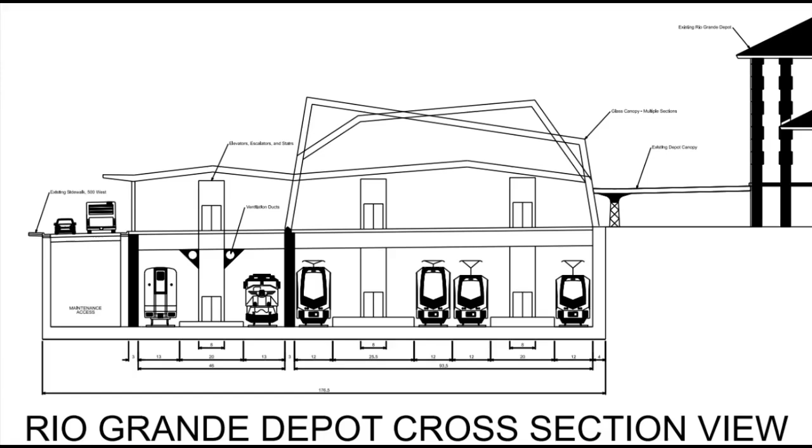The Rio Grande Plan is a vision for returning rail service to the Rio Grande Depot in downtown Salt Lake City. This means some sort of grade separation will be necessary, since the old rail right-of-way is now, and always was, a public road. Salt Lake City has needed the benefits of grade separation for a long time, with extra-long freight trains blocking traffic, including pedestrians and emergency vehicles, from moving between neighborhoods, especially east-west. Each railroad crossing west of downtown sees about 50 trains per day, and when Frontrunner doubles its frequency by the end of the decade, and with the inland port attracting more freight traffic, this number will be closer to 100 trains per day per crossing.

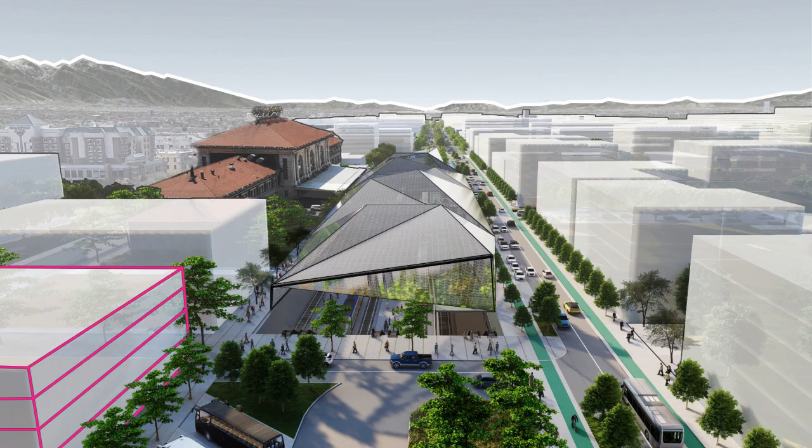The Rio Grande Plan is an opportunity to do 4 things at once. 1. Return rail service to the Rio Grande Depot, giving us one of the grandest train stations in America and a more centralized transit hub worthy of our great city. 2. Grade separate multiple crossings that have become increasingly congested and which have been the locations of multiple fatalities.

3. Relocate the underutilized rail yards and tracks on the west side of downtown into a new corridor, which will open dozens of acres for urban redevelopment. The increased tax revenue from this currently underdeveloped land will be an important source of revenue and could be the location for housing thousands of future Salt Lake City residents. 4. Reconstruct the freeway ramps into shorter, less intrusive structures.

Currently, the 3 big bridges on 4th, 5th, and 6th South extend all the way to 5th West, creating an unattractive maze of one-way streets and dead ends. When the railroad tracks are relocated, there will be no need for these bridges to be so long, and we can cut them back to 6th or even 7th West, opening up a total of 12 blocks worth of new street frontage. The bridge at 4th South can be completely removed, creating a seamless surface street from downtown to Poplar Grove and the Jordan River.

To achieve these goals, I have pitched the specific solution of burying the rails in a train box below the historic rail corridor of 500 West. In the first Frequently Asked Questions video, I give a detailed explanation of the grades and runout lengths required to achieve this specific vision. In short, the affected area would be between 1300 South, 900 West, and 300 North, with the North Temple Frontrunner station left just how it is now. Let's call this Option 1.

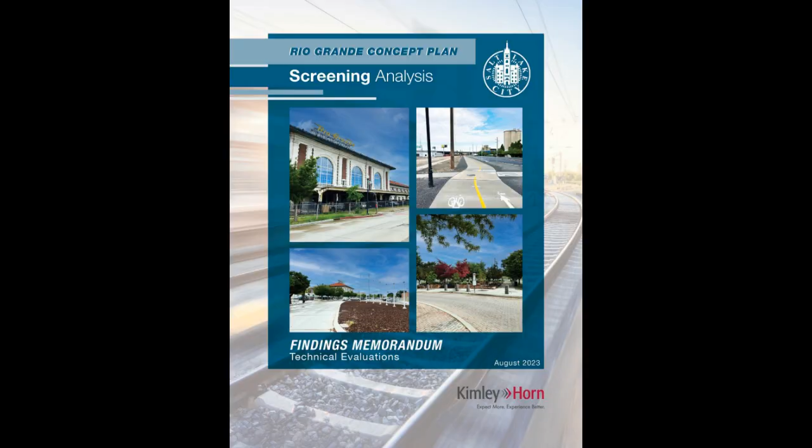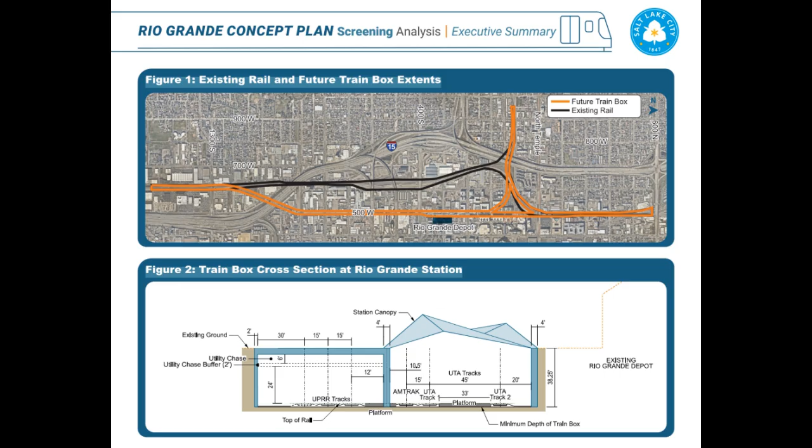In 2023, Salt Lake City published a screening analysis of my original plan, completed by engineering firm Kimley Horn, and this analysis modified the north end of the plan substantially. Instead of ending at 300 North, the plan includes bridges at 300 and 400 North, with the train box finally ending at 500 North. Instead of ending at 900 West, the western extension goes out to 10th West, with bridges at 900 West and 800 West. The original assumed that 800 West could be closed or rerouted instead. This new version of the plan also reconstructed the North Temple Frontrunner station, meaning there would now be 2 new underground commuter rail stations in Salt Lake City. Obviously, all these add-ons were not cheap, and the price tag came in a lot higher than anything I had been expecting, at $3 to $5 billion.

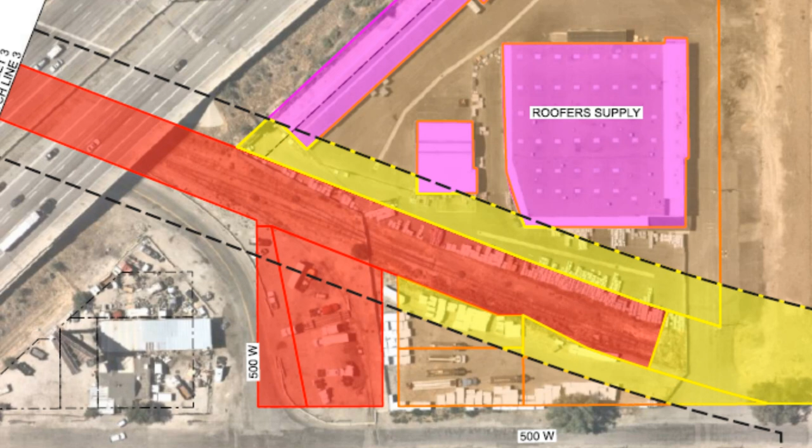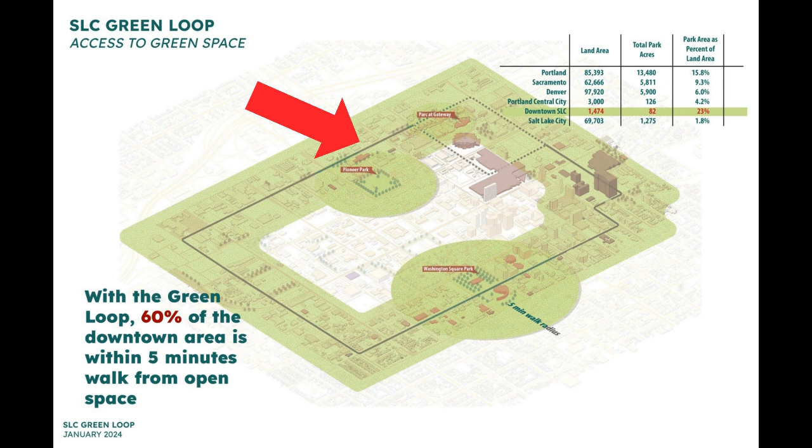Let's call this version Option 2. In the year since that screening analysis came out, the cost of the expanded project has been the main point of attack against the Rio Grande Plan. There have been other attack routes too, such as by property owners who feel that a large train box under 500 West would negatively impact their existing properties, or that the train box would conflict with plans for the proposed Green Loop Linear Park. With each of these criticisms, there have been suggestions on how to reduce the costs and impact of the Rio Grande Plan.

So, in this Frequently Asked Questions video, let's review 6 more alternative grade separation schemes that have been pitched to me. Since we already have options 1 and 2, let's begin with Option 3, Bury in Place.

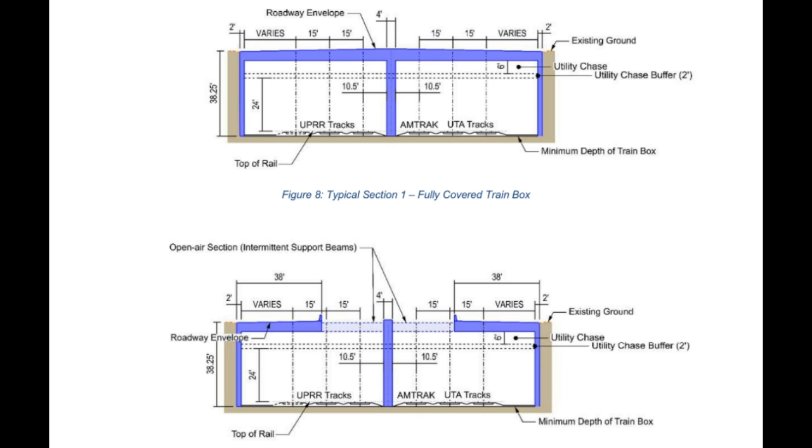This option proposes to build the train box, just like options 1 and 2, except this one would be exactly where the tracks are now, and not on 5th West. The benefit is that 5th West is left undisturbed, and the Green Loop project can proceed as planned. While I personally believe that both the Green Loop and the train box can coexist without issue, I do have to admit it will be much easier to build a park with trees and green space when it isn't on the roof of a huge civil infrastructure project.

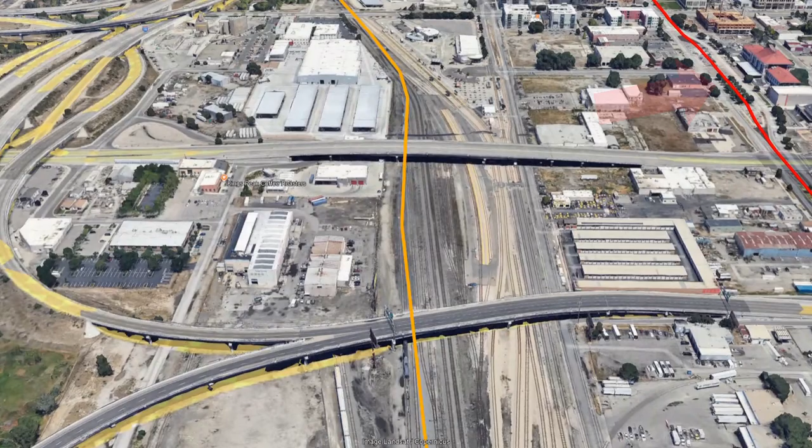Unfortunately, these are the only two benefits to this option, and the downsides are many. The first is that because the Rio Grande Depot is on 500 West, moving the train box means that rail service could not be restored to the depot, and all the benefits of a closer proximity to downtown, a historic and first-class transit facility, and the activation of the western downtown area would all be forfeited. Essentially, this would no longer be the Rio Grande Plan.

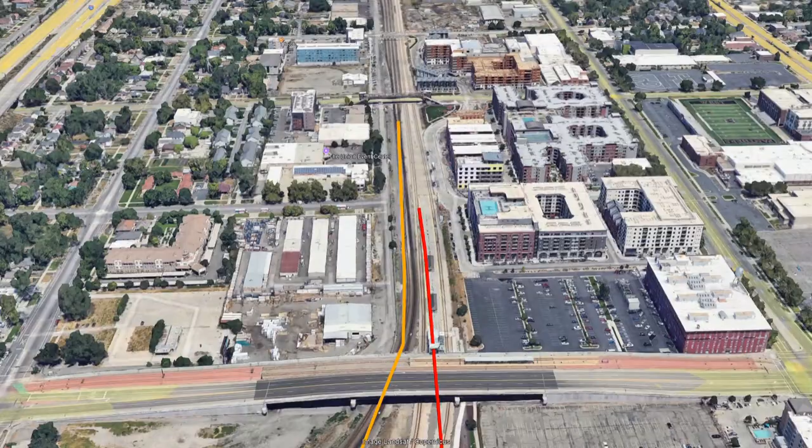While it would be possible to cut back the highway viaducts, as we have proposed, the issue of Salt Lake Central Station being in a non-central location will not be solved. Transit in Salt Lake City will continue to be inaccessible or unappealing for a majority of trips, and our central station design and neighborhood activity will reflect that.

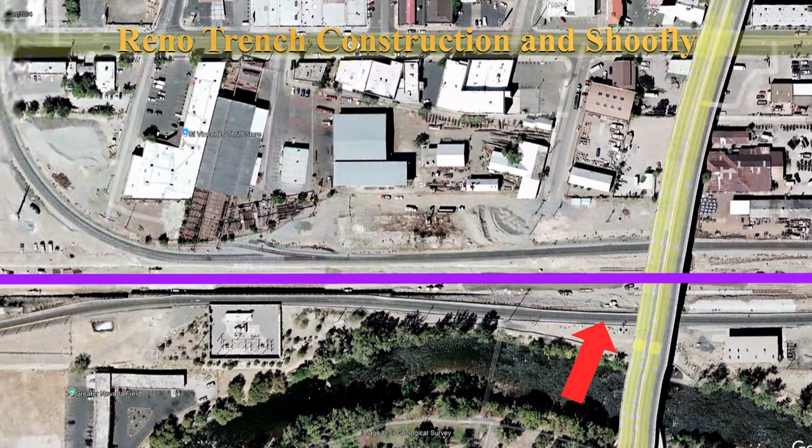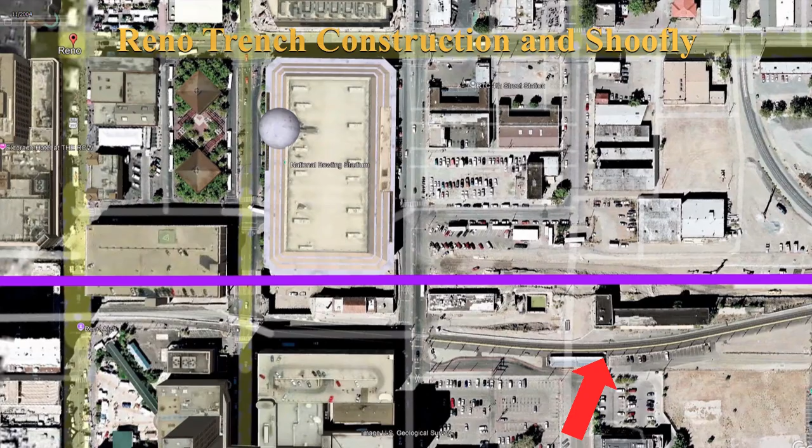Furthermore, this option will probably end up costing even more than the 500 West option. Building a train box underneath an active railroad track is not feasible, so temporary bypasses will need to be constructed and placed in service before construction on the train box can even begin. In Reno, which had a similar issue, this meant a temporary shoofly constructed in the city streets while their trench was dug out and finished.

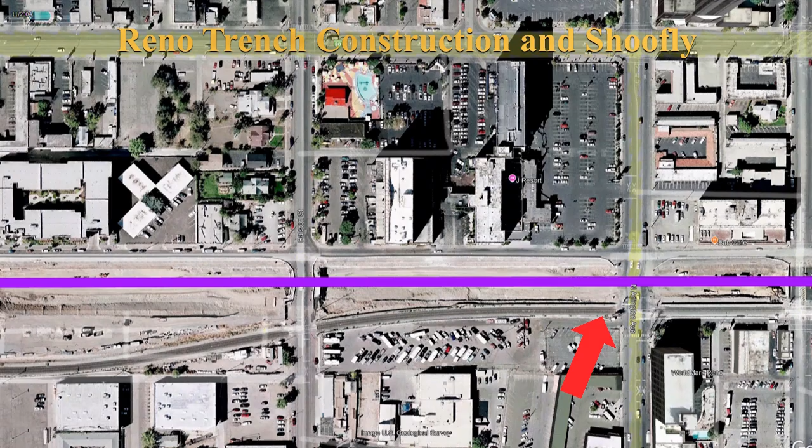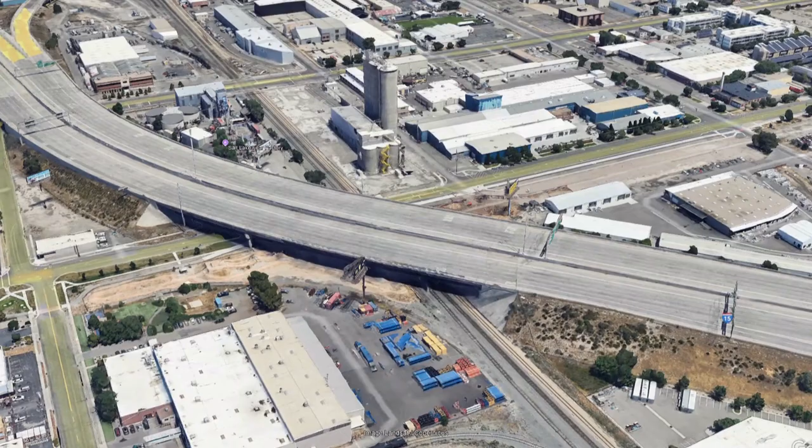This will be disruptive and expensive enough for freight trains, but for UTA commuter trains, this will likely mean years of bus bridges around Salt Lake City, their main source of ridership. Freeway commuters would also be subjected to years of delays, as the I-15 bridge at 900 South is not wide enough to accommodate any more than the 3 tracks it spans now.

This means that the freeway bridge will need to be completely rebuilt to not only be wide enough for 5 or more tracks, but also have foundations that go deep enough to allow it to span over a below-grade train trench. I could keep going, but I think you get the point.

Option 4: Reroute through city blocks to the Rio Grande Depot. This option has the same south end as the previous option, namely building a below-grade box in place below 900 South and 800 South. All the same problems I mentioned before about shooflies and freeway bridges still apply.

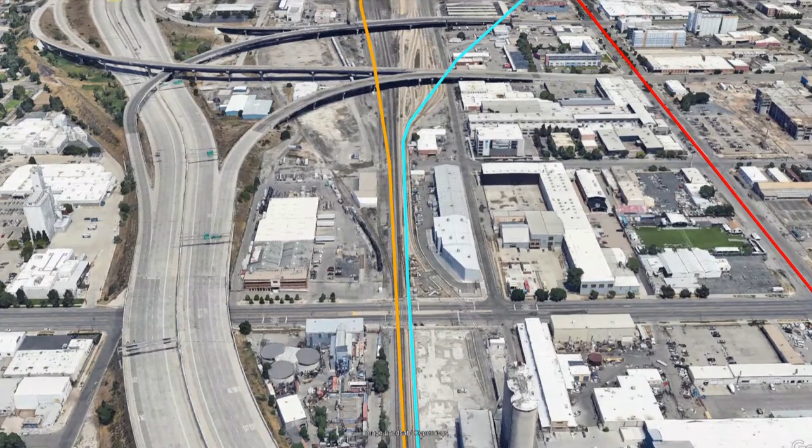But this time, instead of going straight north to Salt Lake Central Station, this option goes cross-country, purchasing right-of-way through existing blocks to switch over from 600 West to 500 West. Obviously, purchasing new right-of-way creates even more expenses, but this time the plan actually does reach the Rio Grande Depot, so at least we are talking about the Rio Grande Plan again.

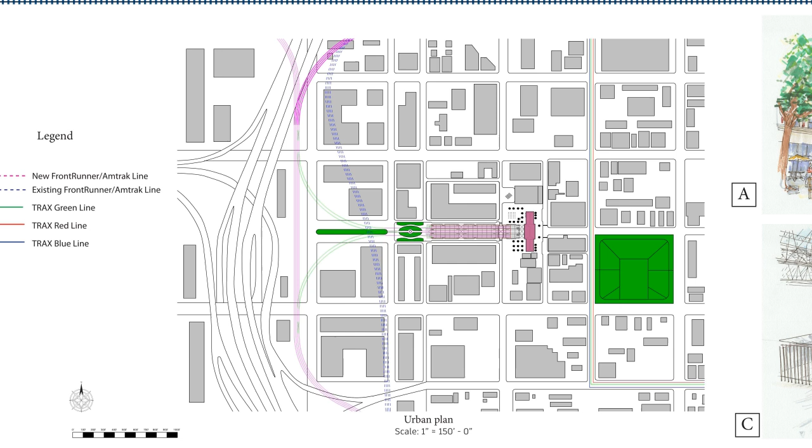But what if there was a simpler way to connect to the Rio Grande Depot? Option 5: The Rio Grande Terminal. What if, instead of a through station, we constructed 4 stub-end tracks on 300 South and turned the Rio Grande Depot into the Rio Grande Terminal?

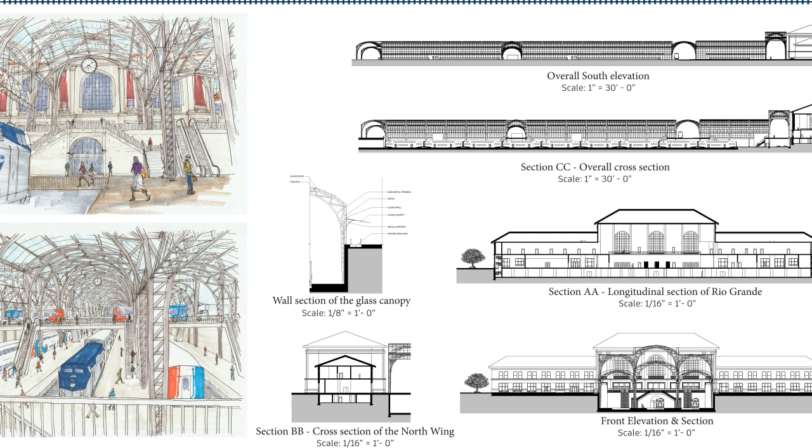After all, 300 South is just as wide as 500 West, so there would be plenty of space for a frontrunner platform and an Amtrak platform, and no space would need to be given to Union Pacific, since they would stay right where they are. This is an idea that was not only pitched but visualized by Yan Ho Ing and Sam Weisler from UVU, which is where we get these beautiful renderings, reminiscent of the old Penn Station in New York City, though the actual design could vary.

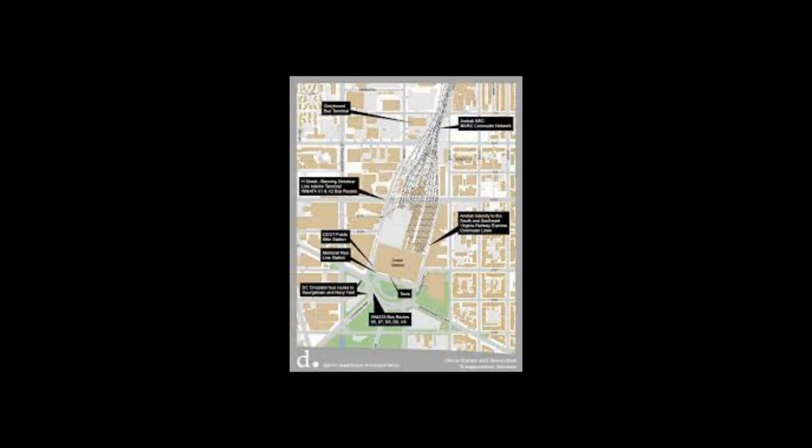Now, it's true that rail terminals have significant operational and capacity issues compared to through-running stations. Trains would need to either back into or out of the station, and the junction into the station would be a perpetual choke point, since we need to allow tracks for both frontrunner and Amtrak to cross over each other. However, bigger stations around the world are able to reliably work around similar issues, so we can't rule this design out based just on theory.

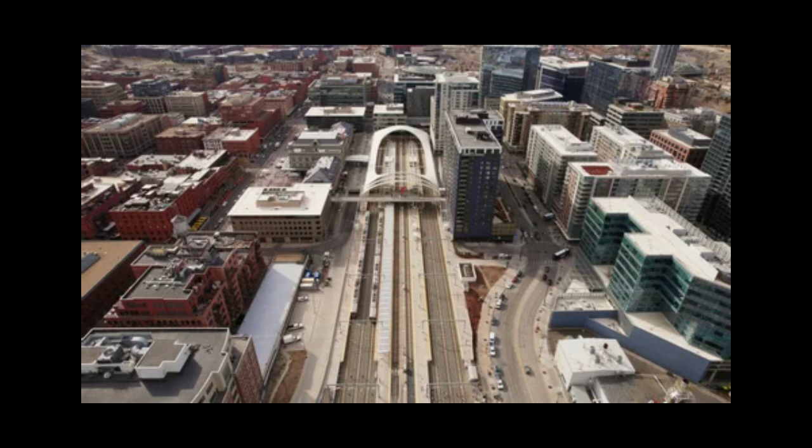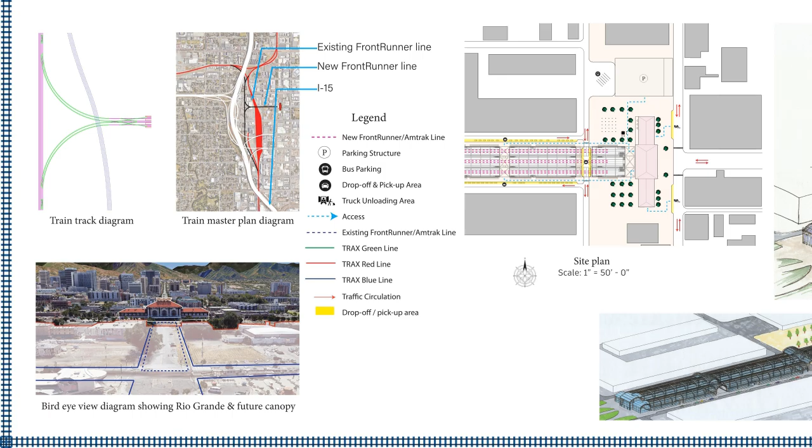Denver Union Station, one of the main inspirations for this project, is a good example of a through station that was reduced to a terminal for the sake of development. And while we in Salt Lake City are arguing about costs, Denver's Union Station is completely paid off and turning a profit.

And since the Rio Grande Terminal would be directly adjacent to the main line, a type of through-running service would still be possible on frontrunner. If everything was running on time, the only noticeable difference from today is that your seat would face the opposite way once you pass the Rio Grande Terminal.

But it isn't all so straightforward. The curves leading up to the terminal wouldn't be compatible with UTA's current headquarters plans and would require some small amounts of RDA land. Furthermore, because Amtrak requires platforms to be at least 1,000 feet long in order to handle their long-distance trains, the station tracks would need to extend all the way under the historic depot and at least as far as 400 West.

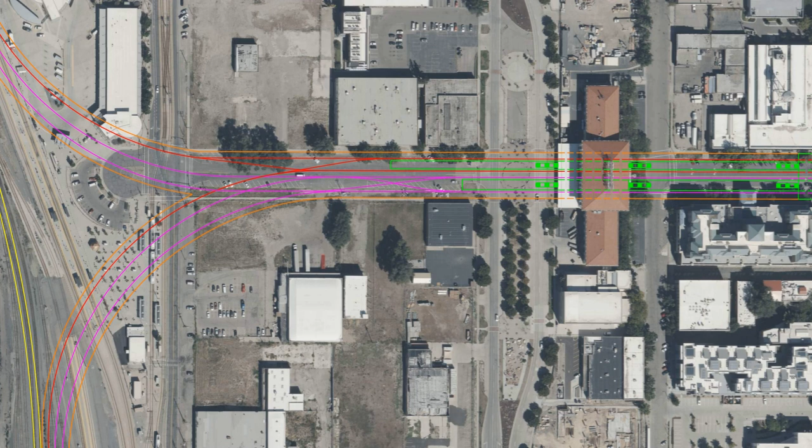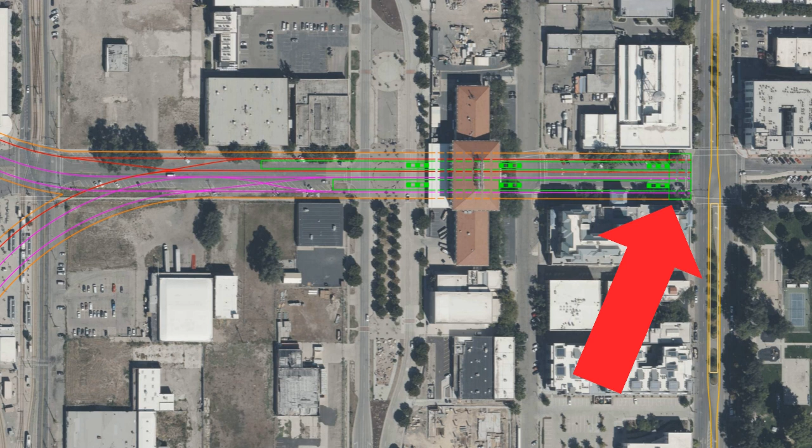That is obviously very expensive, not only because it would require yet another upgrade to the Rio Grande Depot's foundations, but also because it would require the tracks to go even deeper than before just to get completely under those foundations. But there is a silver lining here too. With tracks expanding to the east side, a line up 400 West would be able to deliver passengers directly to the FrontRunner and intercity rail platforms on 300 South, which is a level of convenience unmatched by all other versions of the Rio Grande Plan.

So, while this option does have some fundamental operational and technical challenges, the high level of convenience and the low level of impact to the Union Pacific Railroad make this an interesting idea. Though I personally do not prefer it, I do think it is worth further consideration.

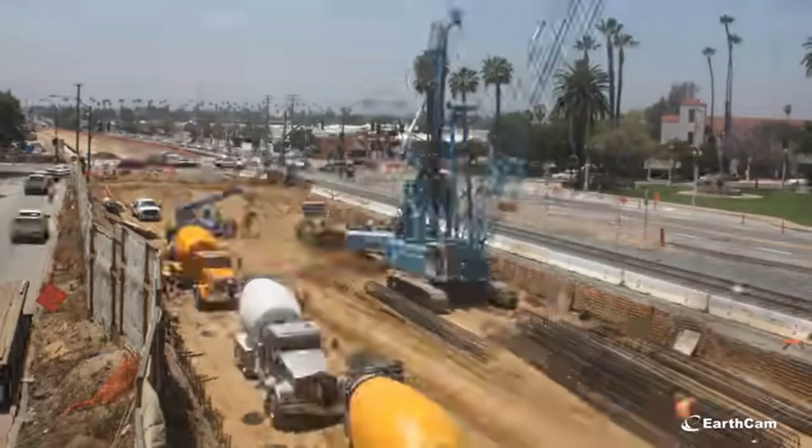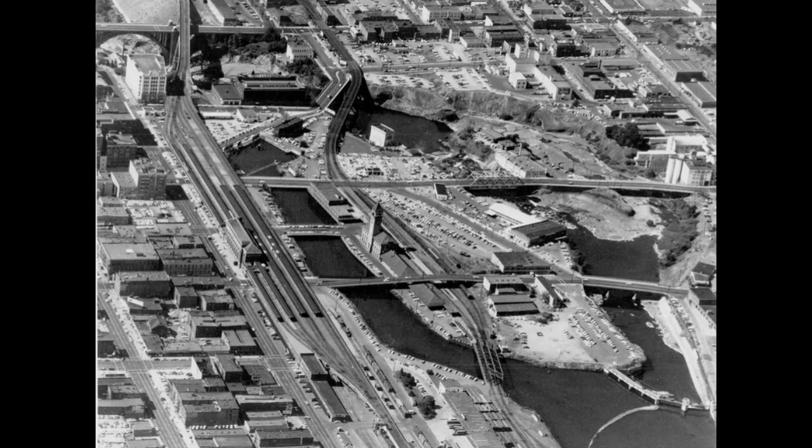Option 6. Elevate the tracks. Digging below grade can be very complicated and expensive, and dealing with the hidden tangle of utility lines is a time-consuming problem. Why not just go up instead of down? This is what local leaders chose for Spokane, Washington, in preparation for the 1974 World's Expo. Spokane's riverfront, the proposed location of the fair, was a tangle of railroad tracks, passenger depots, and freight yards, similar to our own west side.

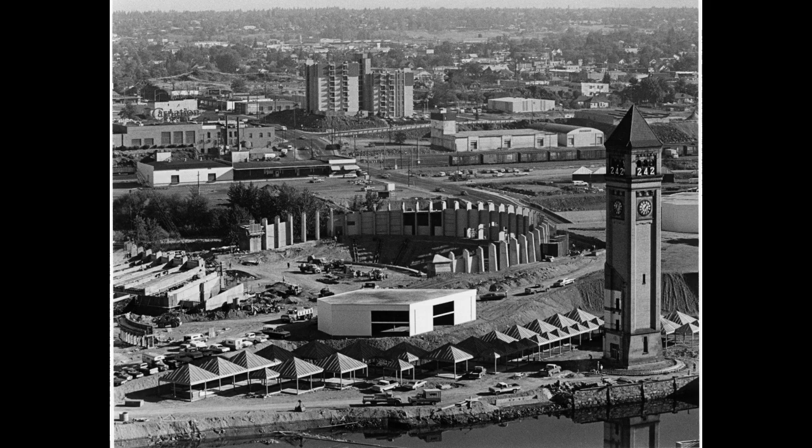However, unlike Salt Lake City, Spokane leadership decided to demolish not just one, but two incredible train stations, leaving only the clock tower of the Great Northern Station to remind residents, forever after, of their historic error. Next, all rail traffic was consolidated from the riverfront to the former Northern Pacific alignment and placed onto a new, elevated structure wide enough for 4 tracks and 2 service roads, totaling 85 feet wide.

End to end, there are 19 railroad bridges through downtown, and all of them have height restrictions for road vehicles and width restrictions for sidewalks. Efforts to improve these bridges have been entirely superficial, because upgrading to modern standards for height and width would be prohibitively expensive, and the private railroad companies have little interest in community engagement.

It is also worth pointing out that when the bridges were built, these were the modern standards for elevated mainline tracks, and they only look uncomfortable to us now because standards have changed. More often, we should ask ourselves, how will the current standards change in another 50 years? Burying the rails will allow the roads above to be continuously updated. Elevating the tracks freezes the infrastructure below them in time.

Beyond design considerations, there are the practical engineering problems. Interstate 15 crosses over the tracks just south of downtown, and elevated tracks would either require the tracks to go up even higher than the freeway, or require the freeway to be raised to double height, which would have cascading effects to half the ramps of the 13th South freeway interchange.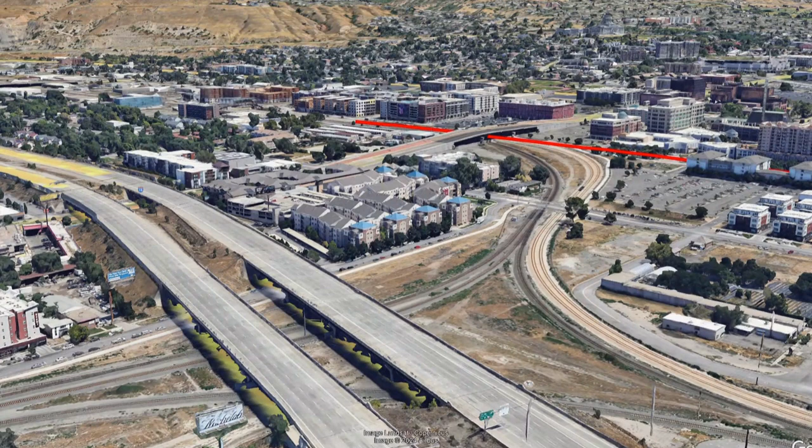A similar conflict exists at the Grant Tower Junction, and the North Temple Viaduct would need to be completely ripped out. And all of this hasn't even touched on the conditions of 500 West, which would somehow have to accommodate up to 6 elevated railroad tracks while still attempting to be an inviting neighborhood street. But what if we don't need to accommodate all 6 tracks?

Option 7. Elevate just the passenger trains. What if we leave the freight tracks where they are and elevate just the UTA and Amtrak tracks? After all, FrontRunner can climb steeper grades than freight trains, and already has 2 significant aerial structures as part of its existing route. Amtrak can and does climb grades just as steep as the FrontRunner, so it should be possible to have the tracks ramp down after crossing 100 North, back to street level before the North Temple Viaduct and North Temple Station.

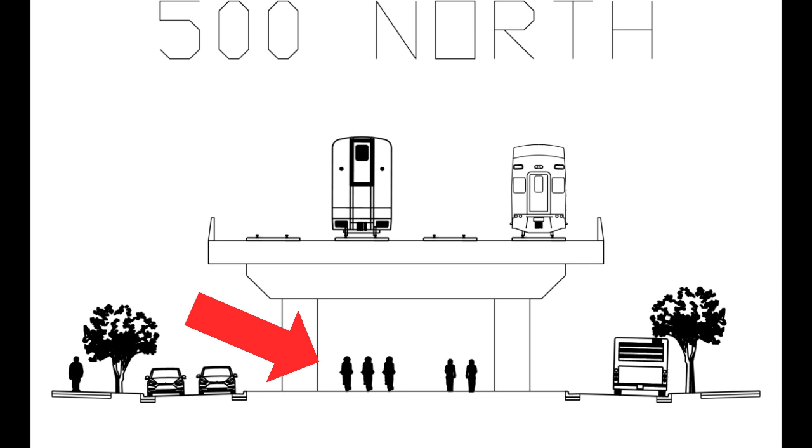With only 3 tracks, 1 for Amtrak and 2 for FrontRunner, the elevated structure would be thin enough to not cover the entire street below. Perhaps just the green loop can go under the structure so as to be sheltered from the sun and snow.

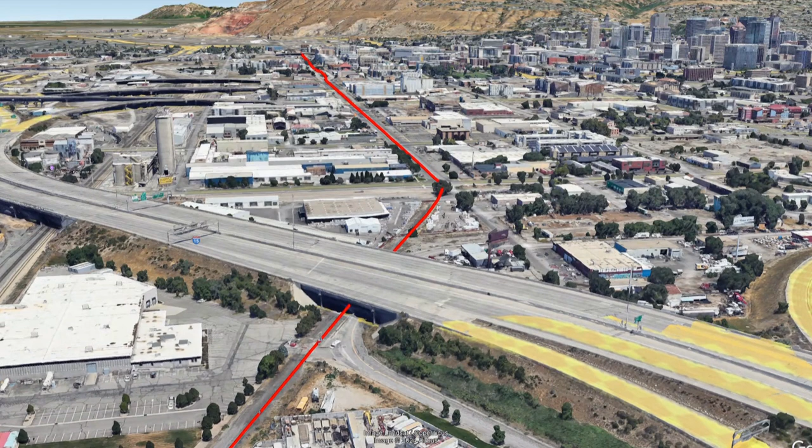The south end, however, has all the same problems as the last option, complete with I-15 being reconstructed across multiple bridges and freeway ramps. That is not a way to reduce costs, and none of this changes the freight situation, since those tracks would remain where they currently are. But I feel like we may be onto something. Let's take this full circle with our final option.

Option 8, the 2-phase Rio Grande Plan. Let's take the idea of routing only passenger trains to the Rio Grande Depot and put just those in the train box on 500 West. The freight tracks will be part of a second phase, and will remain just where they are for now. By keeping the freight tracks separate, we are able to significantly reduce the width and depth of the train box.

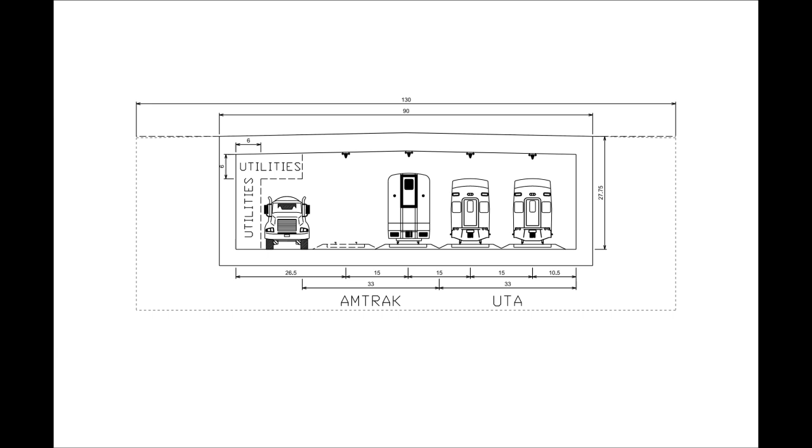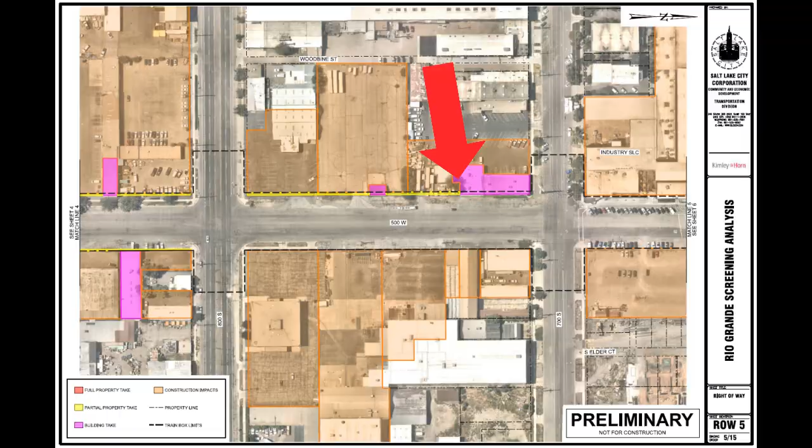I'm showing 2 tracks for UTA's FrontRunner, space for up to 2 intercity passenger rail tracks, a service access road, and a horizontal utility chase. Whereas the full version of the train box from option 2, the Kimley-Horn study, was over 130 feet wide and ran right up against building facades on 500 West, this smaller version of the box would be only 90 feet wide, including this extra space for utility lines.

90 feet is exactly as wide as the current pavement limits, which would not only spare building facades and other private property impacts, it would allow for trees to easily line the street, which is important for things like the Green Loop.

Now, I am being a little unfair to option 2. The purpose of that document was never to optimize and reduce impacts. Rather, it was to demonstrate the full functionality of the rail corridor within a new right-of-way. The requirements for the option 2 train box would have gotten smaller during the design process. However, it is doubtful they would have ever gotten below 110 feet wide, and certainly nothing as small as this new option 8.

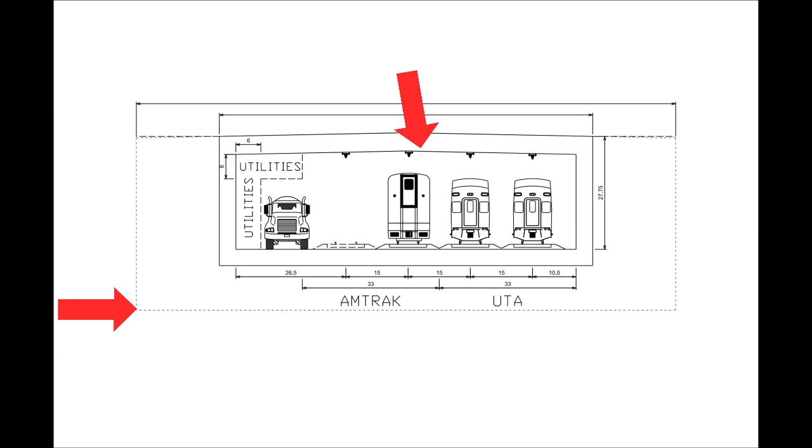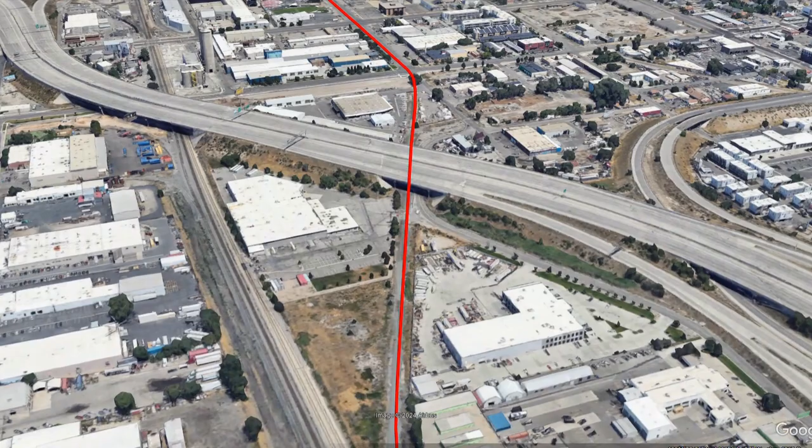Another way to reduce costs is in structure depth. Since passenger trains are not as tall as a standard double-stack container car, we can save 3 feet of depth here, even with consideration for future electrification. Additional depth can be cut out of the design by giving the utilities a horizontal allotment rather than a vertical one, which will save 8 more feet for a total of 11 feet. This is a big deal because retaining structures get increasingly more expensive the deeper they go.

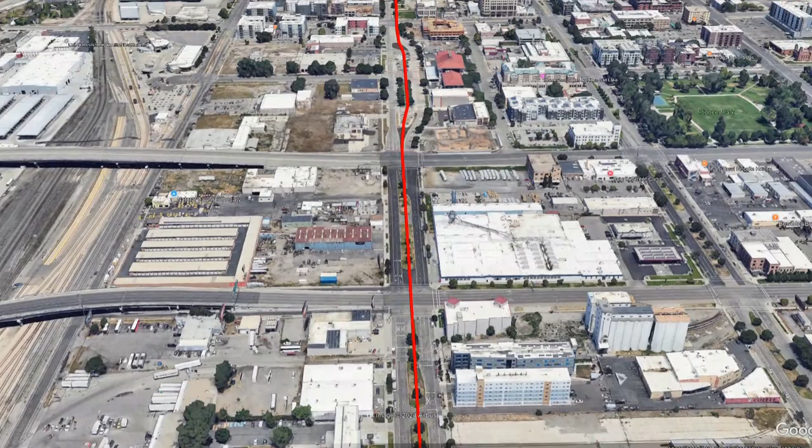By saving 11 feet over the 2-mile project area between 1300 South and North Temple, 11 feet of wall area on both sides adds up to just over 232,000 square feet of wall area. At $300 per square foot, as used in the Kimley-Horn screening analysis, that would save about $70 million, just in walls.

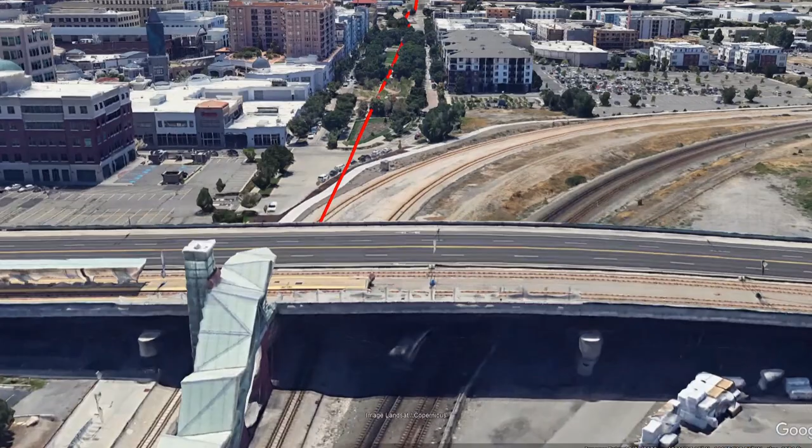The amount of actual excavation is also reduced, due to both the depth and width reductions, and in this scenario could be reduced by over 28 million cubic feet, for a cost savings of over $425 million. Once we add in the 30% contingency, these 2 reductions alone amount to a savings of about $650 million. And we're only just getting started.

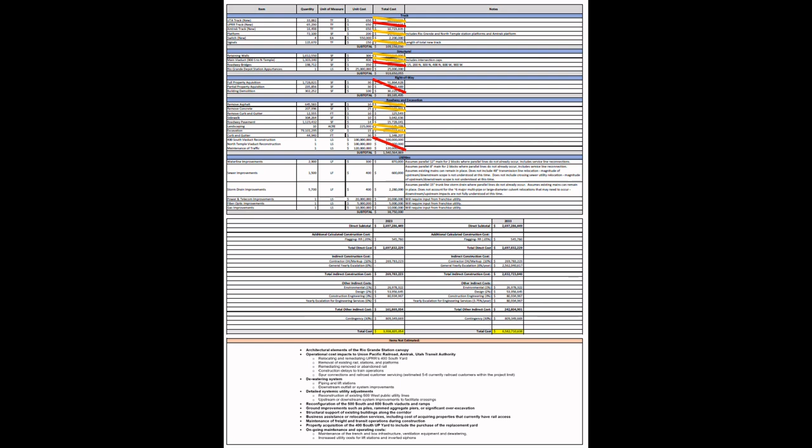Once you cut the spur to the west, including property acquisitions, demolitions, and all the costs of underground construction, then cut out the new North Temple Station, since we can leave the current station just how it is, then cut out the replacement of 2 viaduct approaches that were affected by the wider train box, cut out the replacement I-15 bridge at 500 West, required, again, by the wider train box, reduce the size of the cross-street bridges, and reduce the amount of track, switches, signaling, and construction phasing required by the longer, flatter ramps used by the Union Pacific Railroad, and suddenly we are left with a project that is, at most, in the $1 to $2 billion range, rather than the $3 to $5 billion from option 2.

Cutting the price in half like this would be significant enough to completely change the current narrative surrounding the Rio Grande Plan. However, we're only saving on costs at this point because, so far, we haven't done anything to address the freight tracks. Leaving the freight tracks for a future Phase 2 would be understandably disappointing for Westside residents. But it would be good politics if we want to get the Rio Grande Plan completed before the 2034 Winter Olympics.

I've been told by multiple well-connected sources that, while the costs are a significant problem on their own, the biggest practical roadblock for the Rio Grande Plan is the involvement of the Union Pacific Railroad. Getting the private railroad company to cooperate and participate in a civic improvement project of this magnitude on this schedule would be unprecedented.

Obviously, the Union Pacific Railroad is no stranger to below-grade structures. After all, the Reno Train Trench, which inspired the Rio Grande Plan, is on the same Union Pacific main line that connects through Salt Lake City, and, of course, the Union Pacific has operated through the Alameda Corridor and San Gabriel trenches in California for years without issue. But all 3 of these trenches were built in place, not on a new alignment carved out of city streets. From the railroad's point of view, they would much prefer to have their own facility anyway, not owned by a government agency or shared with public transit.

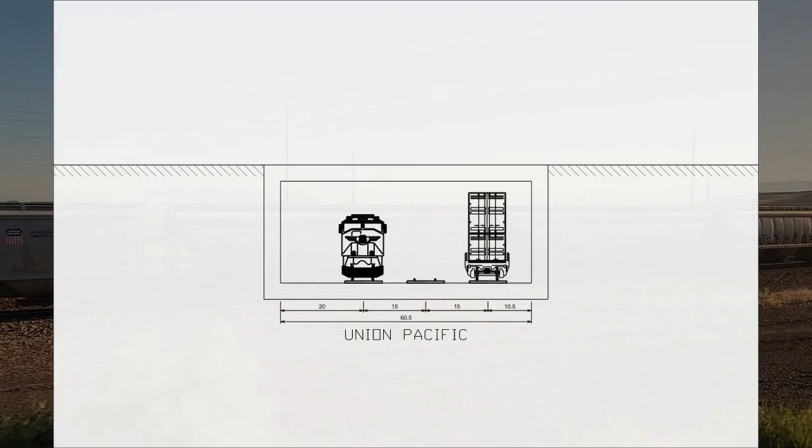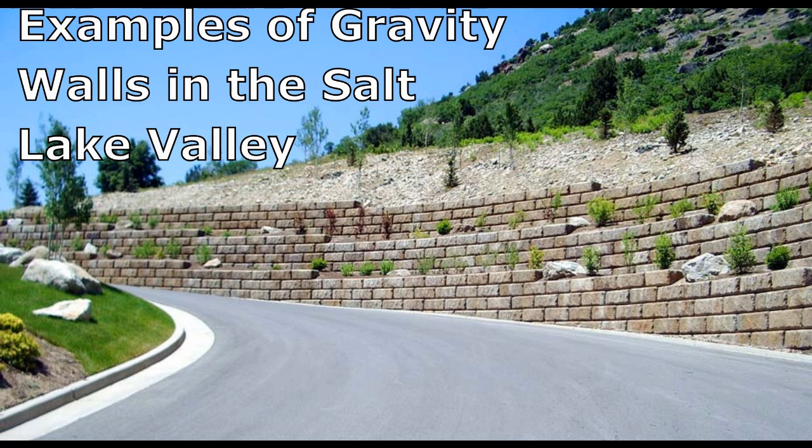Since there is so much space in the underutilized rail yards, we could make do with slopes rising up from the below-grade tracks, which are significantly less expensive to construct and maintain than vertical walls. In some locations where geometry is a little tighter, gravity walls built on a slope, or even concrete slope protections like you see at freeway interchanges, could be used to lessen the required width far more economically than a vertical structural wall. While the excavation costs will still be large, building this way could turn out to be cheap enough that the combined phases 1 and 2 of the Rio Grande Plan could still end up costing less than the $3 to $5 billion estimated for option 2.

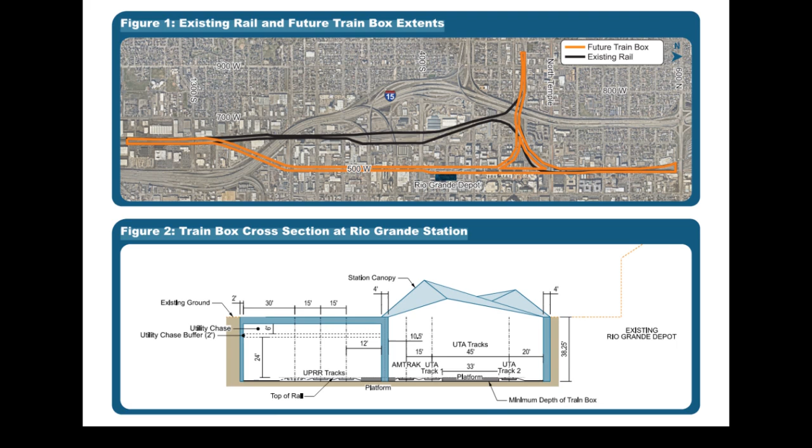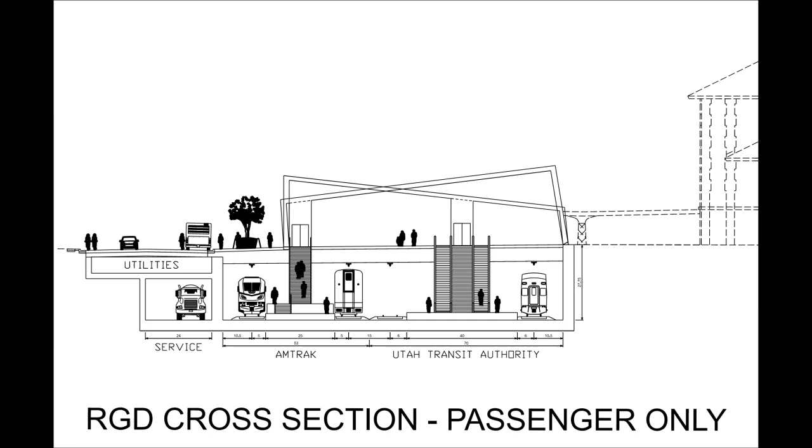Another benefit of the phased approach comes at the station itself, which would no longer need to give valuable space to freight trains. Platforms for Frontrunner and Amtrak could be made extra wide, so that the platforms can work more efficiently and never get crowded. Additionally, passenger trains would never need to tolerate the noise and vibrations and pollution caused by passing freight trains. Similar to Denver Union Station or other station redevelopment projects across the West, freight and passenger trains would remain separate. After all, what is the purpose, really, in having freight trains downtown?

How long would it take between Phase 1 and Phase 2? Assuming we were to complete Phase 1 before the 2034 Winter Olympics, it would probably take another decade at least before anyone had the appetite for more grade separations. After all, by burying only the passenger trains, and assuming UTA doubles their frequency in 2030 as planned, we would be directing 75% of trains into the 500 West train box, leaving only a quarter of rail traffic at grade. Ever since Frontrunner began operation, all of the pedestrian incidents and fatalities at these crossings have occurred with Frontrunner trains because they are faster and more frequent. This would be largely eliminated in Phase 1.

Furthermore, while freight trains will still continue to pose an inconvenience to West Side residents, they will potentially become less inconvenient with an important change already in the works. The Salt Lake, Garfield, and Western Railroad currently has its main yard near the Jordan River, right about where the Miller Group is proposing their new Major League Baseball stadium to go. Work is already underway to relocate the main yard to a site further west by the inland port. Once this is done, the tracks along South Temple Street will no longer be a location for switching carloads of freight, but will be for through running only. While trains will still be long, they should keep moving.

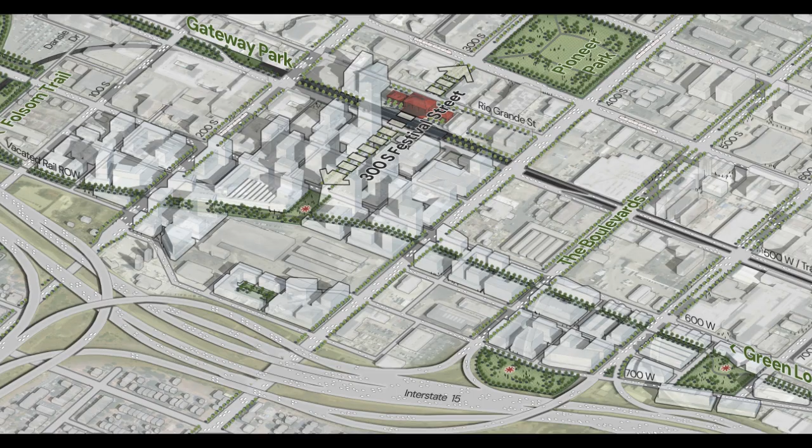Another source of stopping is switching for the few remaining customers that exist in the 6th West freight yards. I've spoken before about how, with time, most, if not all of these customers will eventually move away on their own, as their property values become too valuable to not cash in on. One of the things holding property values back in this area, besides the highway overpasses, is UTA's current Central Station, which, for the past 25 years, has squandered the economic potential that a city's Central Station should have. By moving to the Rio Grande Depot and making the neighborhood desirable for developers and residents alike, the push to redevelop the rail yards will grow organically, rather than as part of a government mega-project. Once that happens, it is possible that the Union Pacific sells part or all of the 6th West yards all on its own. After all, they've done it before, in places such as the Burnham Yards in Denver, or the land for the Gateway Mall here in Salt Lake City.

Overall, I really like option 8, but it isn't my preferred option yet. I would need to have serious assurances that a second phase of grade separation would definitely happen before I could support the phased approach. The purpose of this video is to show that there are many good ideas that have yet to be incorporated into the Rio Grande Plan, and that it is still very much open for public discussion. Perhaps one of these good ideas will come from you.